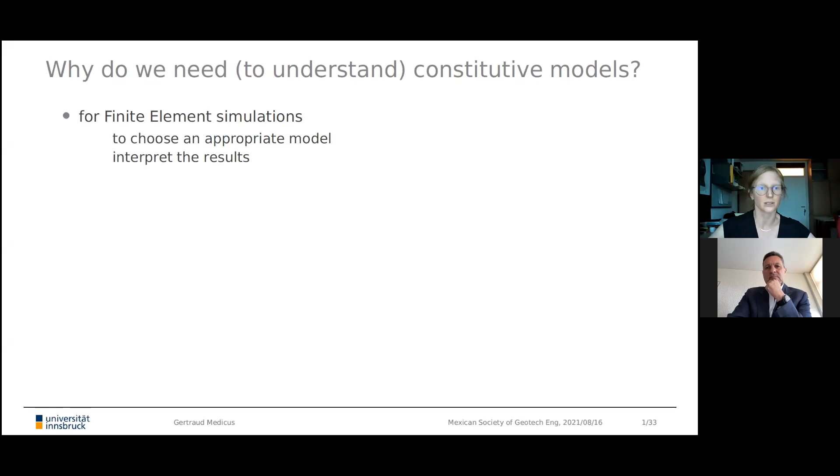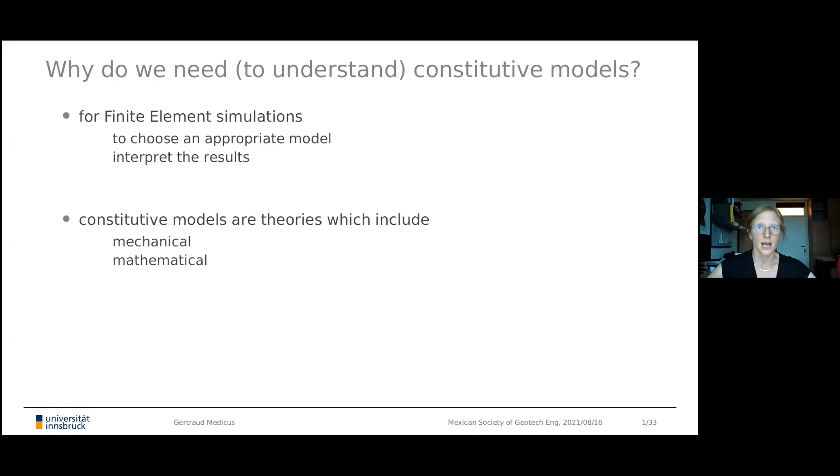Before I show the visualizations, I will give a short introduction to the topic. Why do we need constitutive models and why do we need to understand them? We certainly need constitutive models if we carry out finite element simulations, and we need to understand the model in order to choose an appropriate model and in order to interpret the results. In addition, constitutive models are also theories which include certain mechanical and mathematical concepts, and understanding these concepts can also help to understand and explain soil mechanics. Constitutive models are therefore frameworks which provide the possibility for further understanding.

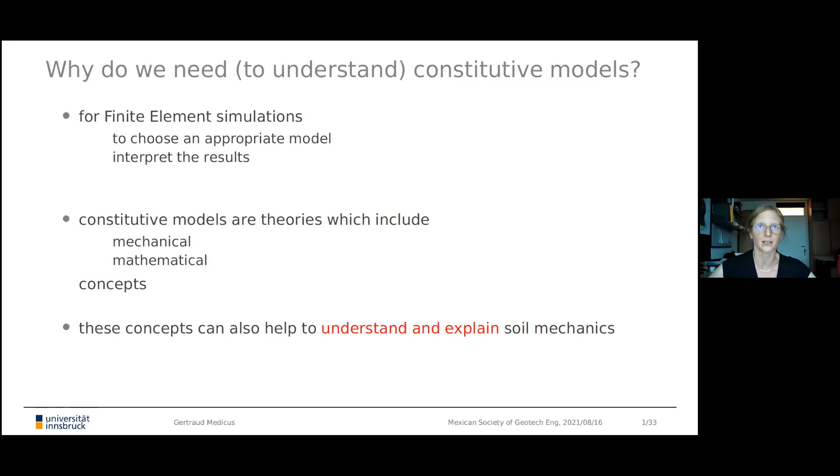There are many important aspects related to teaching and learning constitutive models. Amongst others, one has to carry out computations in order to understand the equations. It's important to get explanations and it's important to have discussions. There are fantastic books related to constitutive modeling, and of course there are university courses and videos available. And there's definitely a lot more.

In this presentation, I will hardly talk about the issues above, because I will only or almost only show visualizations and animations as one possibility to improve the visual aspect of teaching soil constitutive modeling.

The project I'm talking about is an ongoing project. I will therefore not present a complete and finished project. I just picked certain topics related to yield and failure surfaces and different constitutive models. And within these topics, I choose and explain certain included concepts.

This presentation should give an overview about the project, and I want to address two perspectives: the learning perspective, where I will give some explanations, and the teaching perspective. I want you to get an overview of what can be used from this project, because the whole idea behind it is to share the visualizations as teaching and learning material with everyone.

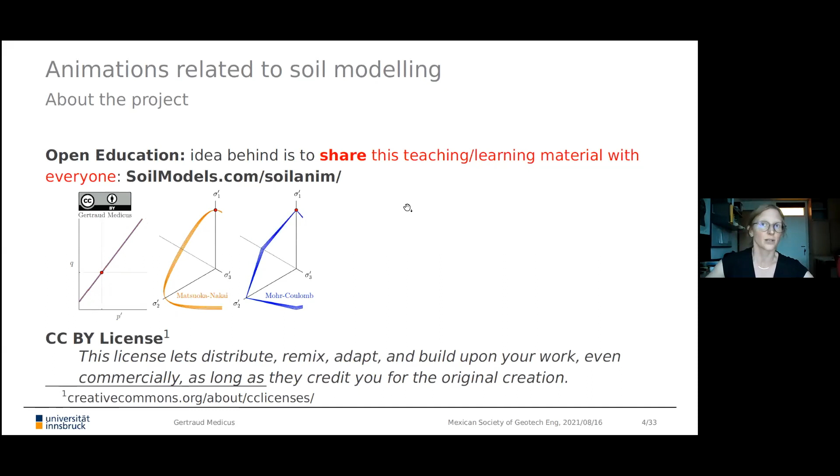I will now give a short introduction on stress measures and stress invariants. In this whole presentation, stresses are considered positive in compression, and we often use principal stresses to characterize a certain stress state in geotechnical problems. If we then also only consider axisymmetric stress state, it is sufficient to display stresses in the PQ plane, mean effective stress versus deviatoric stress. The red line is, for example, the Mohr-Coulomb failure line with zero cohesion.

I show an example of a stress path of a conventional drained triaxial test of rather loose sand. I will a bit later show corresponding stress-strain curves and volumetric response. This is just for the introduction here.

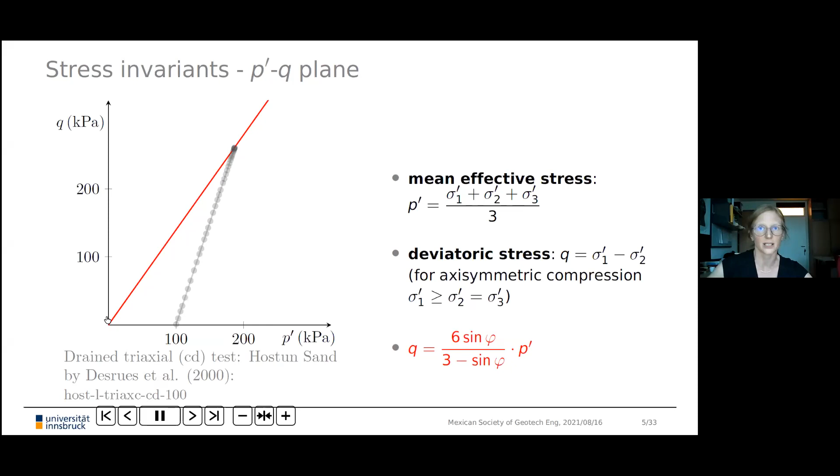If I continue to just consider principal stresses, then we can display a general stress state in three-dimensional principal stress space. On this slide, I show the Mohr-Coulomb hexagon in principal stress space. The blue line is the hydrostatic axis, which includes the mean effective stress of a certain stress state, that is the red bullet here. And the distance of this red stress state to the hydrostatic axis can be described by...

...the deviatoric stress. Now I let the hexagon rotate towards the deviatoric plane if we look in the direction of the hydrostatic axis. In order to define the location of this red bullet, this arbitrary stress state, we need a third stress invariant or stress measure.

And that can be the Lode angle. In this presentation, I use the following definition of the Lode angle: for triaxial axisymmetric compression, the Lode angle is chosen to be 30 degrees, and for triaxial axisymmetric extension, the Lode angle is minus 30 degrees. So we have one possibility for three stress invariants: the mean effective stress, the deviatoric stress, and in the deviatoric plane, the Lode angle.

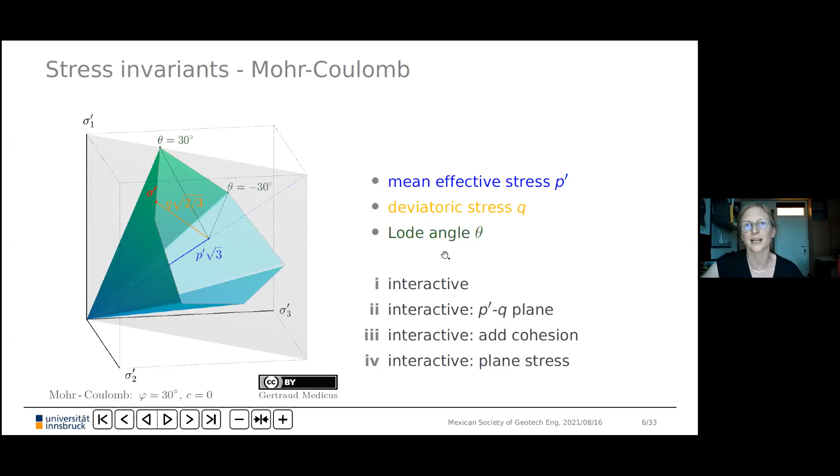One disadvantage of the animations is that I choose where you have to put the focus, I choose where you have to look. And maybe you would be interested in looking at another direction of the Mohr-Coulomb hexagon. That's why I recently started making interactive graphics.

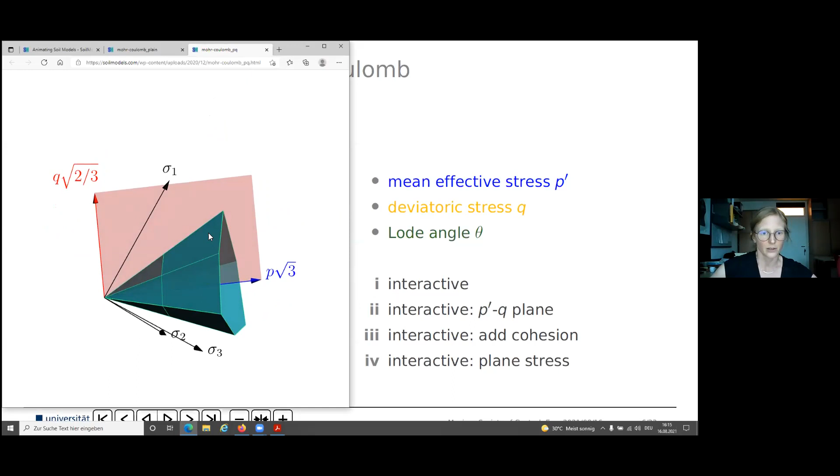Here I again show the Mohr-Coulomb hexagon, and you can zoom in, zoom out, and turn it yourself, for example towards the deviatoric plane. Here I added the p'-q plane for triaxial axisymmetric compression states, and you can again turn yourself, for example towards the deviatoric plane or wherever you want.

In this plot, I added cohesion to the Mohr-Coulomb hexagon, which results in a shift of the hexagon. Adding a cohesion allows certain tensile stresses and also allows plane stress predictions. And that's what we can see here, where the solid and transparent part of the hexagon meet. That's how plane stress prediction would look for the Mohr-Coulomb hexagon, including cohesion.

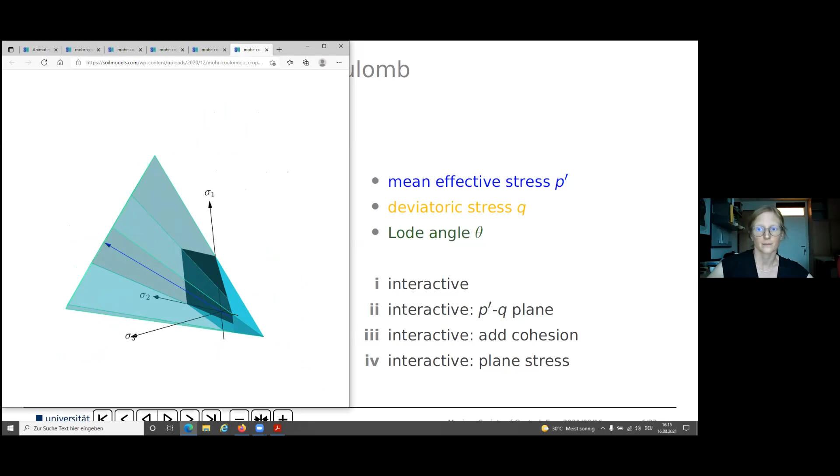I will continue to show more yield surfaces, and I will also show more of these interactive plots. Here I want to mention that all of these interactive plots have been created with the software Asymptote.

Asymptote is a free software, very useful for creating diagrams and very nice for creating 3D figures. And talking about Asymptote, I want to thank Hans-Peter Schröcker, a mathematician, for suggesting to use this software, because it is very suitable for creating these kinds of figures, and I hope also for understanding shapes, even a bit later, more complex shapes of 3D surfaces.

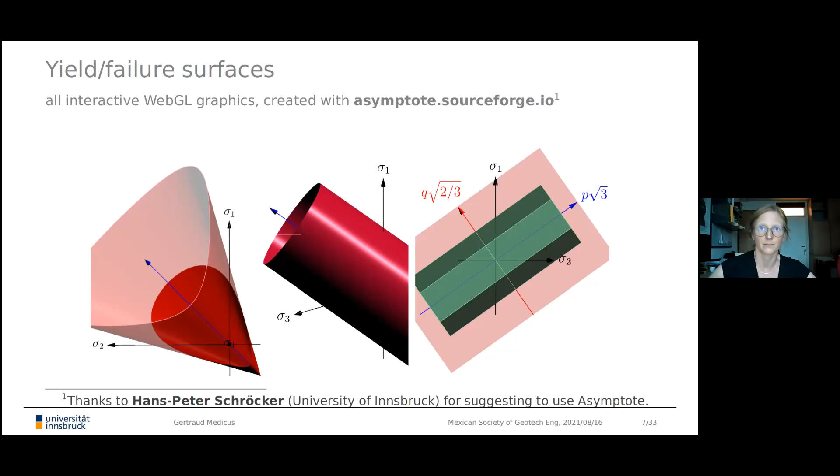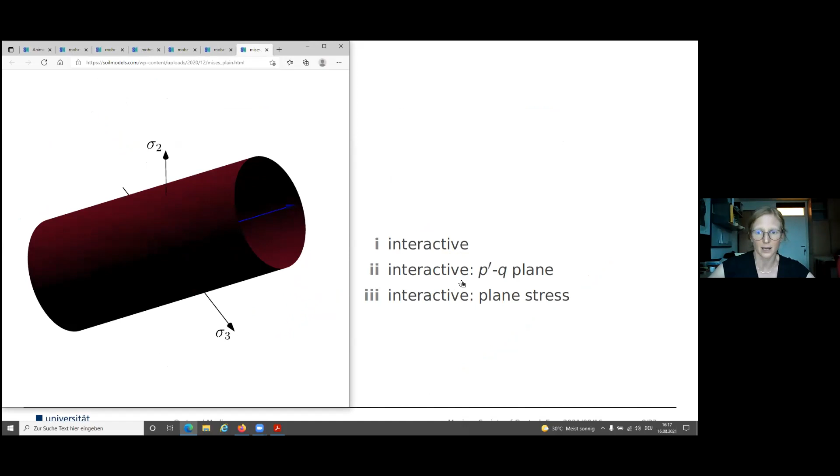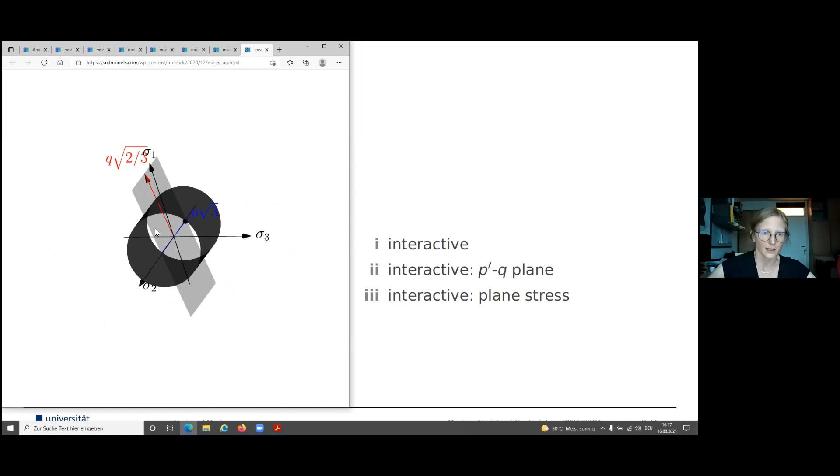Here I show the yield surface according to von Mises. The cylindrical shape implies that strength is independent of mean effective stress. If I increase mean effective stress, I still get a constant shear strength.

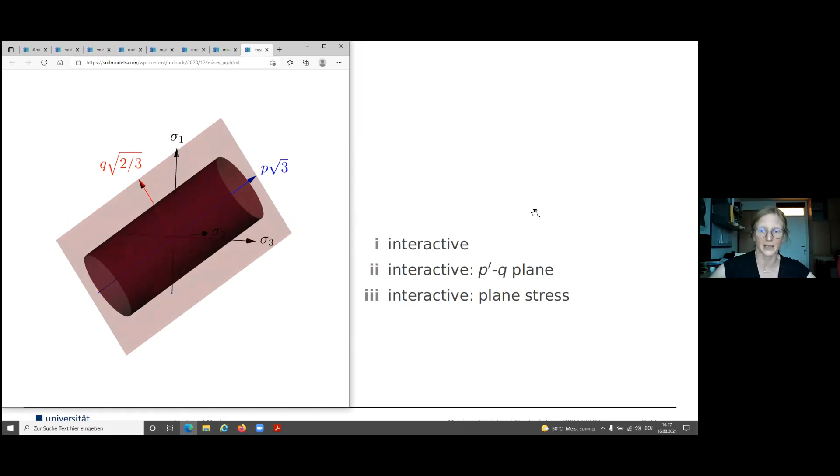The von Mises criterion is used mainly to describe yielding of metals. And again, you can have a look how plane stress predictions would result from the von Mises yield surface.

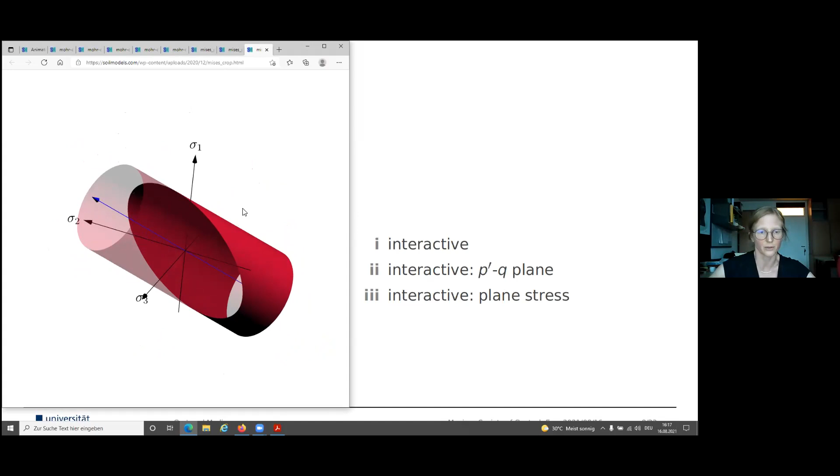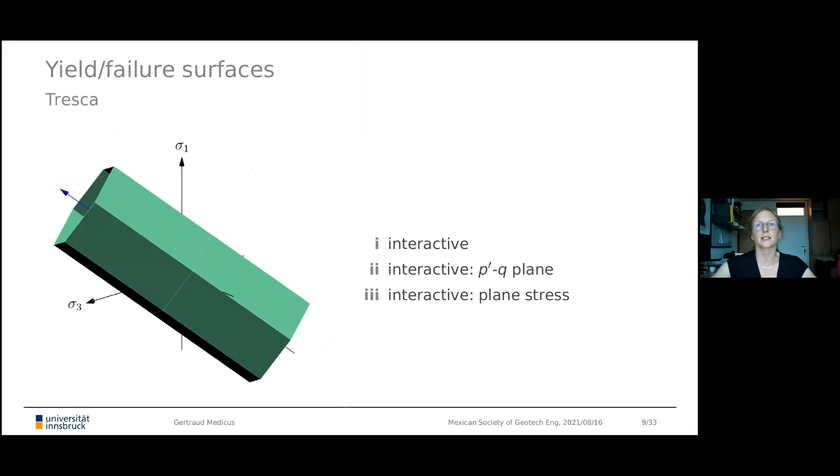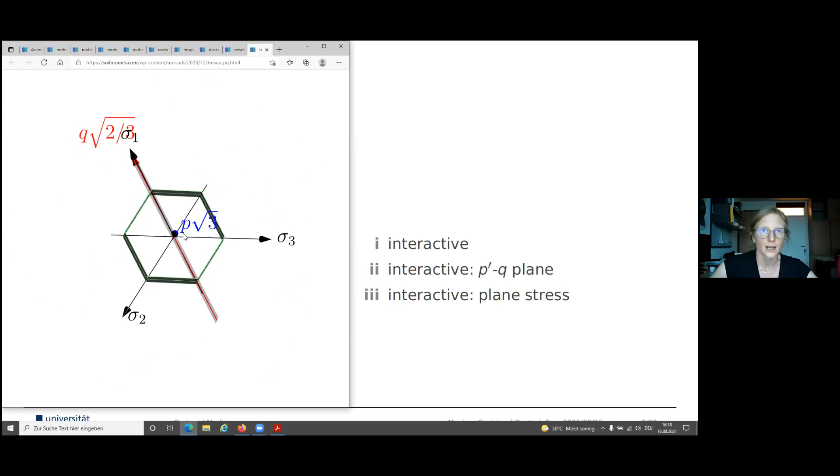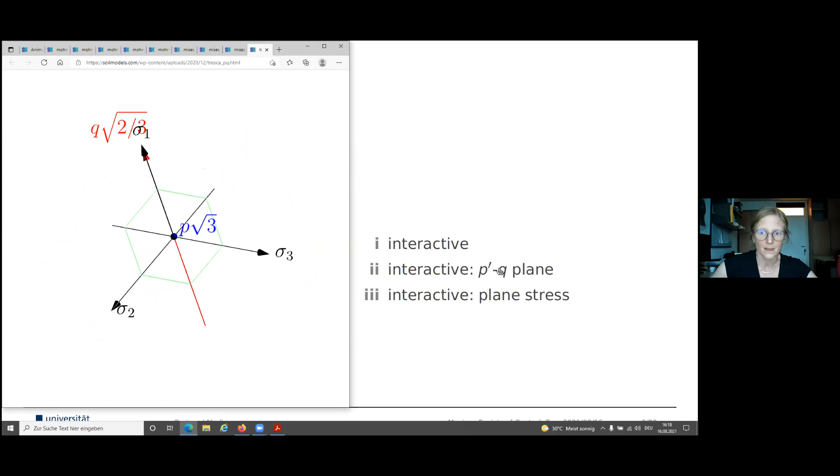A bit similar to that is the Tresca yield condition, whose intersection with the deviatoric plane is a regular hexagon. Again, we can see that an increase in mean effective stress does not affect strength predictions, at least not for a constant Lode angle. You can again have a look where the transparent part meets the solid part, how plane stress predictions would look for the Tresca yield condition.

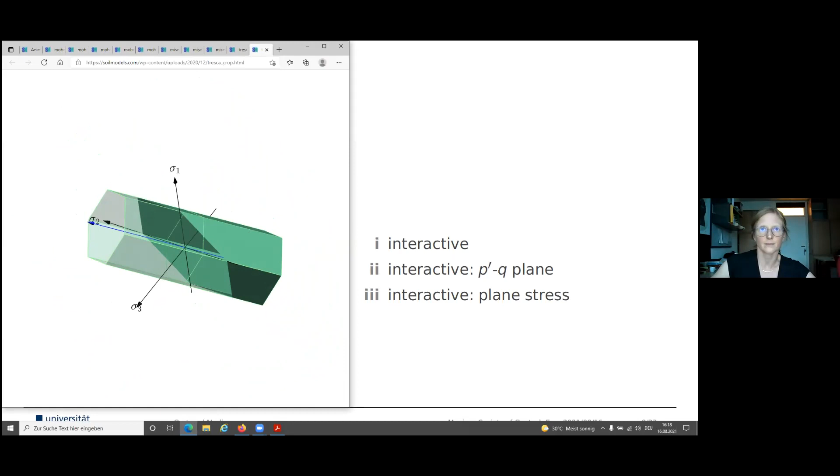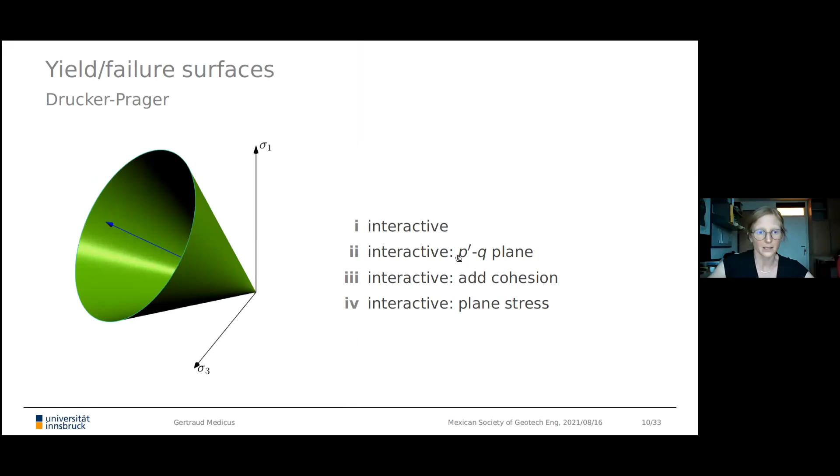That's different to those surfaces describing strength of frictional materials, as I started with Mohr-Coulomb. Here I show Drucker-Prager with a circular shape in the deviatoric plane, and it's again visible that an increase in mean effective stress results in an increase of deviatoric strength. Adding a cohesion results in a shift of the Drucker-Prager surface towards the tensile stresses.

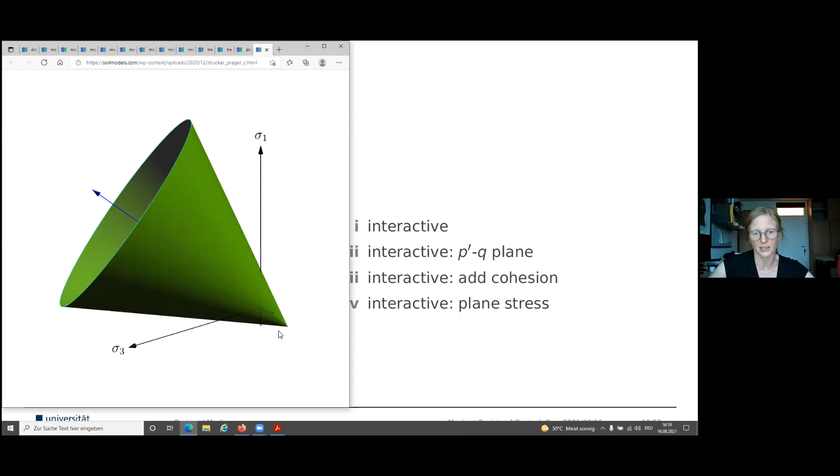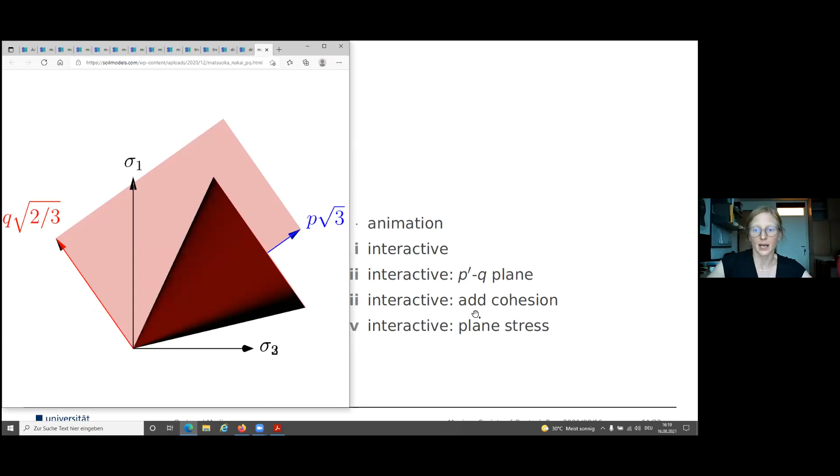On this slide I show the cone according to Matsuoka-Nakai. On the website, and also linked in the handout, you can have a look at the same animation as just shown for Mohr-Coulomb, and even a bit longer. I again added the p'-q plane and cohesion, and I also show how plane stress predictions would look for Matsuoka-Nakai.

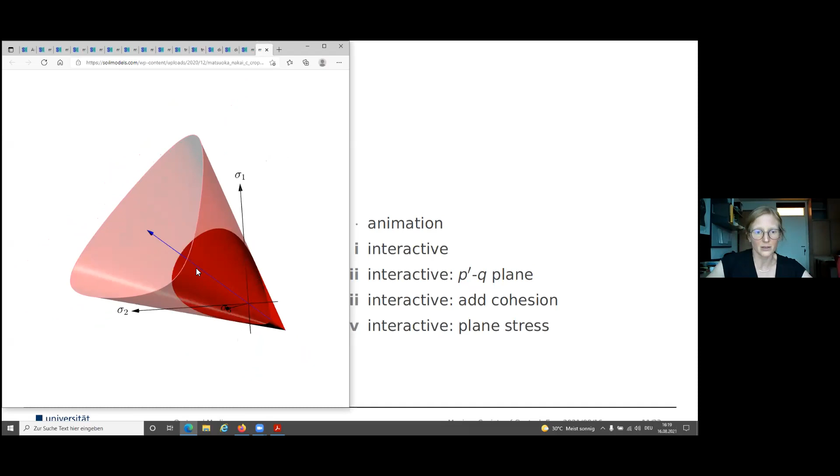Probably you could already see that the shapes of Matsuoka-Nakai and Mohr-Coulomb differ. To better estimate how much they differ, it helps to plot them in one diagram here on the left. Blue is again the Mohr-Coulomb hexagon, and red is Matsuoka-Nakai.

On the left, I show the difference between Matsuoka-Nakai and Mohr-Coulomb by comparing the mobilized friction angles for different Lode angles. Here, for a friction angle of 30 degrees and zero cohesion, the predictions for triaxial axisymmetric extension and triaxial axisymmetric compression coincide. I start the animation at triaxial axisymmetric extension and slowly increase the Lode angle, and we can see that the difference in mobilized friction angle increases up to around 17%, and somewhere between 0 and 15 degrees the difference is highest.

Then, as this point further approaches axisymmetric triaxial compression states, the strength predictions coincide again. The range of Lode angles somewhere between 0 and 15 degrees is exactly the range where plane strain failure is reported to occur. As geotechnical problems are often idealized under plane strain conditions, it's definitely worth focusing on that range when you investigate a constitutive model.

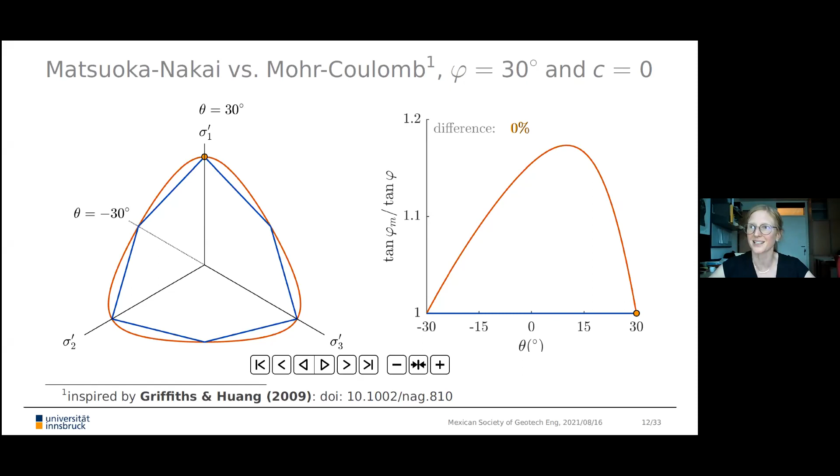I hope you can still hear me. It's pouring outside and it's quite loud, but I hope it still works.

This is the normalized deviatoric plane with experimental data of critical stress states of reconstituted San Francisco Bay mud. Again, in blue, I show Mohr-Coulomb, and I fitted the experimental data with Matsuoka-Nakai, choosing the friction angle of Mohr-Coulomb so that axisymmetric compression and extension states coincide. Doing that, Mohr-Coulomb predictions are conservative compared with Matsuoka-Nakai and compared with the experiments.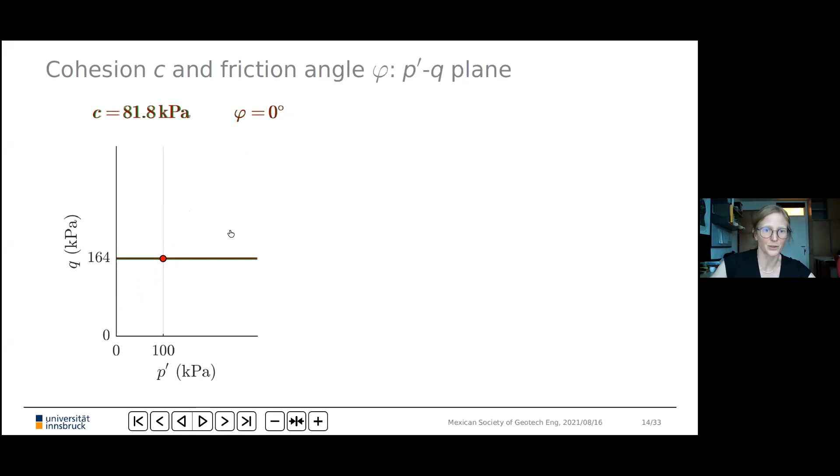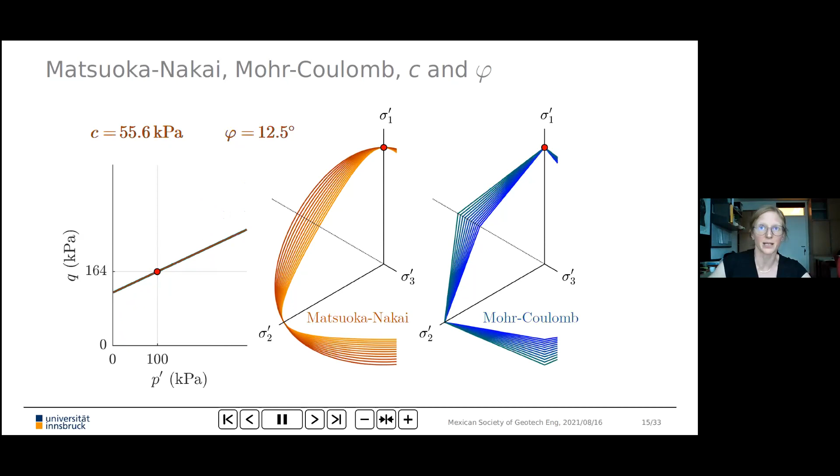I will now just repeat the same here on the left. I will keep this axisymmetric compression state fixed, and I display the deviatoric planes for 100 kilopascal, with Matsuoka-Nakai added in the middle and Mohr-Coulomb added on the right. I will continue to increase the cohesion and reduce the friction angle, and if we look at the deviatoric planes, we see that this also affects the strength prediction for all deviatoric directions except axisymmetric compression.

Eventually, Matsuoka-Nakai for zero friction angle and constant cohesion will turn into Mises, and Mohr-Coulomb will turn into Tresca for zero friction angle. So it's important to keep in mind that the cohesion affects the shape of failure surfaces in the deviatoric plane, even though strength for axisymmetric triaxial compression is kept constant in this animation.

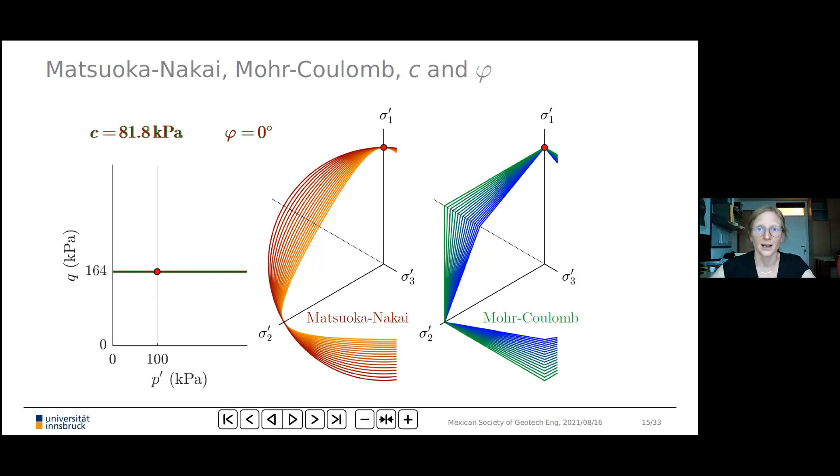So far I haven't talked about a single constitutive model, but only about yield or failure surfaces, which are often included in soil models. I now start with the linear elastic perfectly plastic model, including the failure surface or failure line according to Mohr-Coulomb.

Here on the left is the figure I already showed, the PQ plane with a Mohr-Coulomb failure line and the stress path of an initially loose Hostun sand sample, which approaches the critical state line. Above right, I show the stress-strain response, the deviatoric stress over axial strain, and below I show the volumetric response of the experiment.

I add the simulation with the model, and we can see we prescribe the stress path, and we can see that the strength is described through the Mohr-Coulomb failure line. I tried to fit the initial stiffness with the elastic modulus, and I tried to adjust the Poisson ratio to get an okay response of the volumetric response.

I now increase the initial mean effective stress from 100 to 200 kilopascal, and we can see here exactly what we want: that an increase in mean effective stress results in an increase in strength, and that's what we can see in both figures above. We can also see that an increase in stress level does not result in an increase in stiffness; it keeps the stiffness constant.

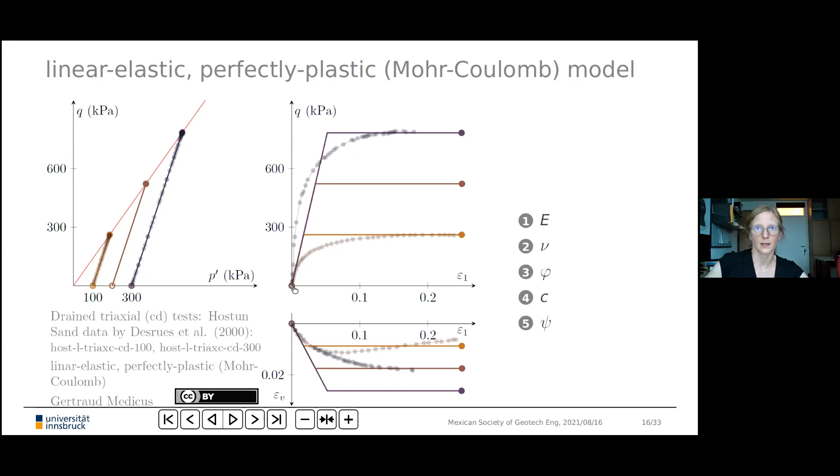On the next slide, I vary the Poisson ratio, increasing it for this response of a conventional drained triaxial test. For this conventional drained triaxial test, we can see that a change in Poisson ratio only affects the volumetric response in that case. For other element tests with kinematic constraints, such as the oedometric compression test or a plane strain biaxial compression test, the Poisson ratio does affect the stress path.

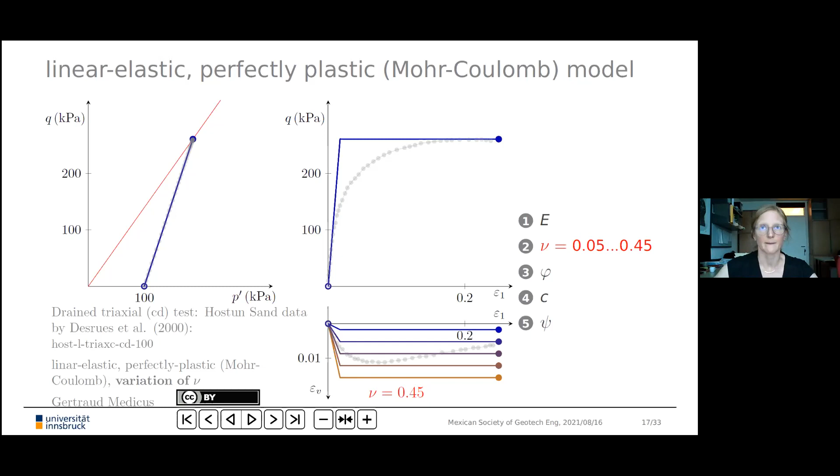I recently uploaded some animations related to the influence of the Poisson ratio on the web page to illustrate the effect on stress path. There is a bit more related to linear elastic perfectly plastic models on the web page.

I will now present models related to critical state soil mechanics. There are a lot of models related to critical state soil mechanics; I chose the modified Cam-Clay model and clay hypoplasticity.

On the left, I again show the p-q plane with the red line, which is the so-called critical state line, and the blue line here is the hydrostatic axis. On the right side, you can see the void ratio-mean effective stress plane, again with the critical state line in that plot, and a so-called normal compression line to define normally consolidated states.

If a constitutive model includes the void ratio or an overconsolidation ratio as an additional state variable, that makes it possible to distinguish between loose and dense states, or different overconsolidation ratios.

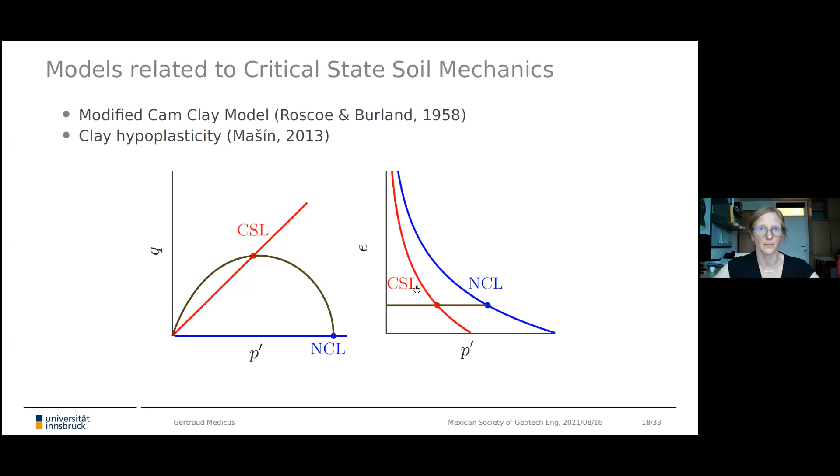In both models, there is a stress-dependent critical void ratio in the void ratio-mean effective stress plane in order to distinguish between loose and dense soil, or for clays between normally, slightly, and highly overconsolidated clays.

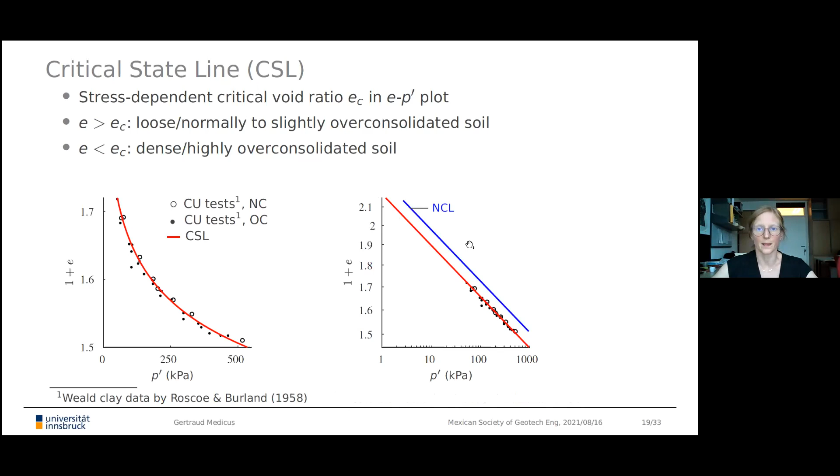Below, I show the void ratio-mean effective stress plane with the critical state line in this plot to distinguish between slightly overconsolidated and highly overconsolidated states, and I show the normal compression line.

I will now show the simulation of a conventional drained triaxial test of an initially normally consolidated clay sample. Normally consolidated means that the current mean effective stress is equal to the pre-consolidation pressure, and that implies that the initial state is on the so-called normal compression line.

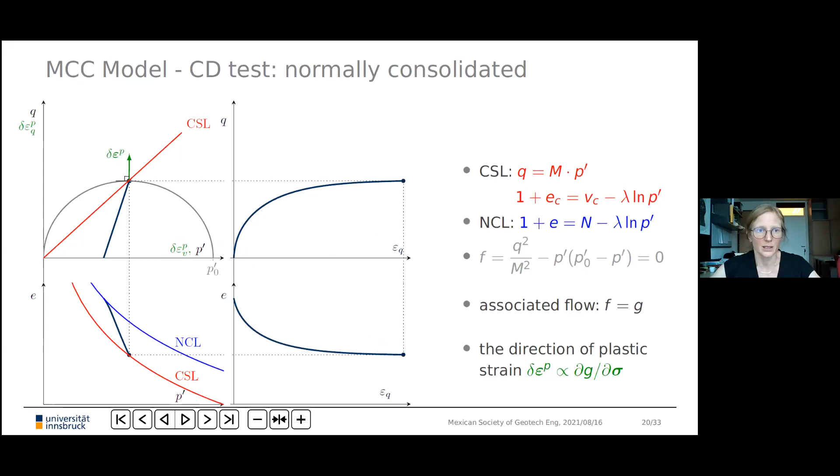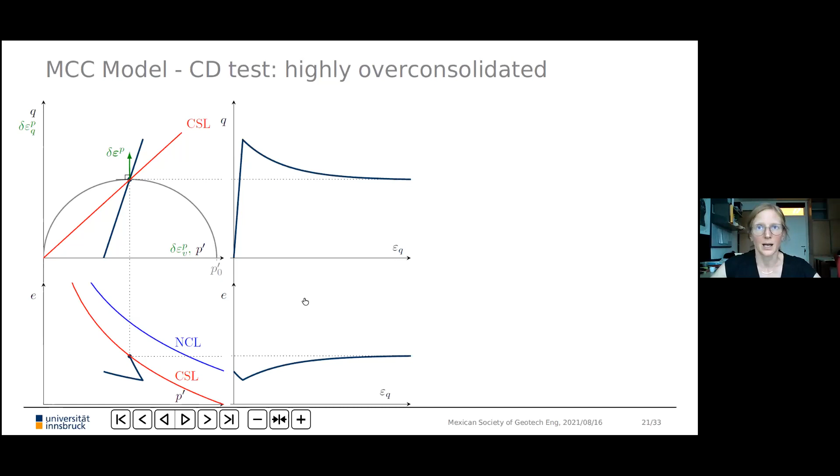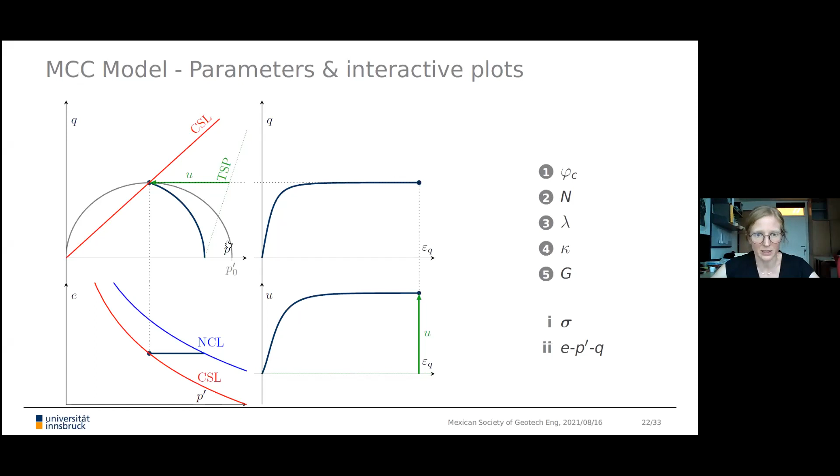I talked a bit about this elliptic yield surface here in stress plane. If we have a look in principal stress space, I can show how the yield locus of the modified Cam-Clay model would look. In the deviatoric plane, in that case, Drucker-Prager is assumed.

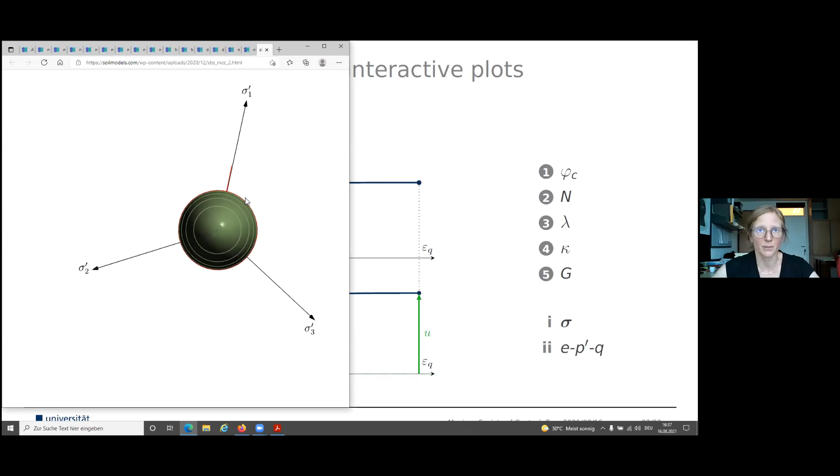That brings me to visualizations related to clay hypoplasticity, which includes very similar concepts as the modified Cam-Clay model. It's just that the mathematics behind it differ a lot.

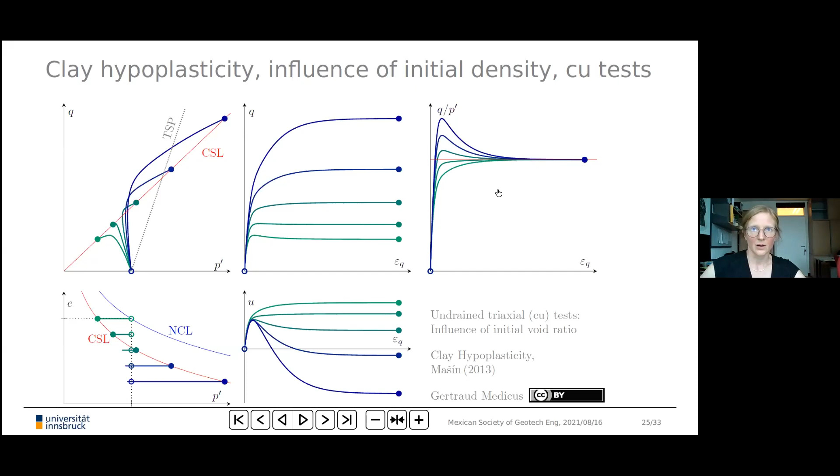We can see here that, independent of this, with a constant void ratio in the framework of critical state soil mechanics, critical strength depends on the initial void ratio, but not on the initial mean effective stress if the void ratio is kept constant in all simulations.

However, again, the initially highly overconsolidated samples can exceed the critical state line, and higher stress ratios than the critical stress ratio can be reached.

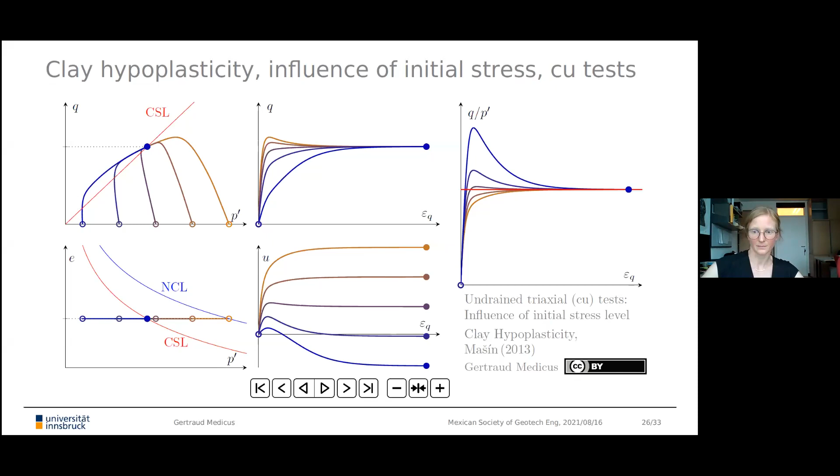And what you can also see here compared to the modified Cam Clay model is that the response is smooth. Yes.

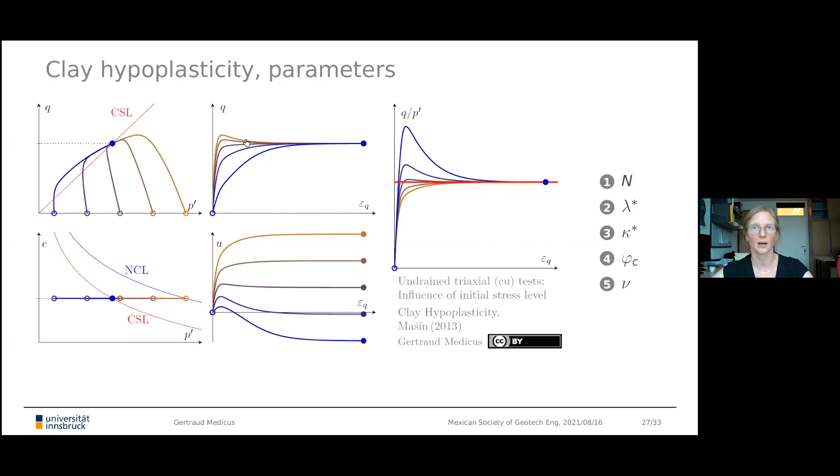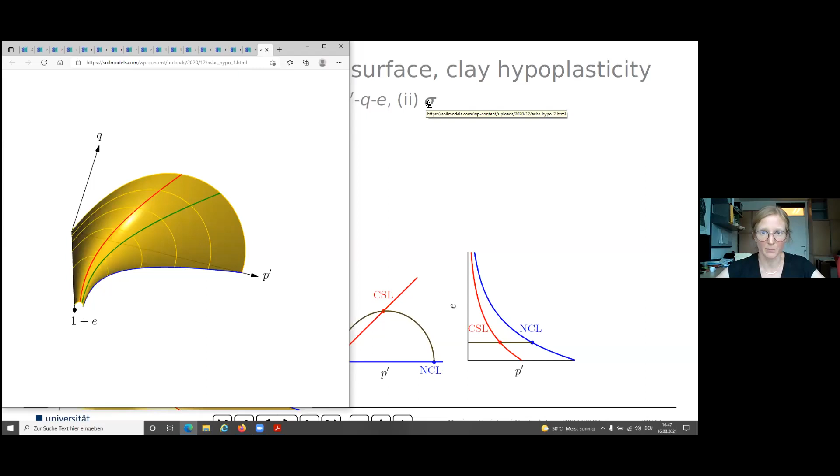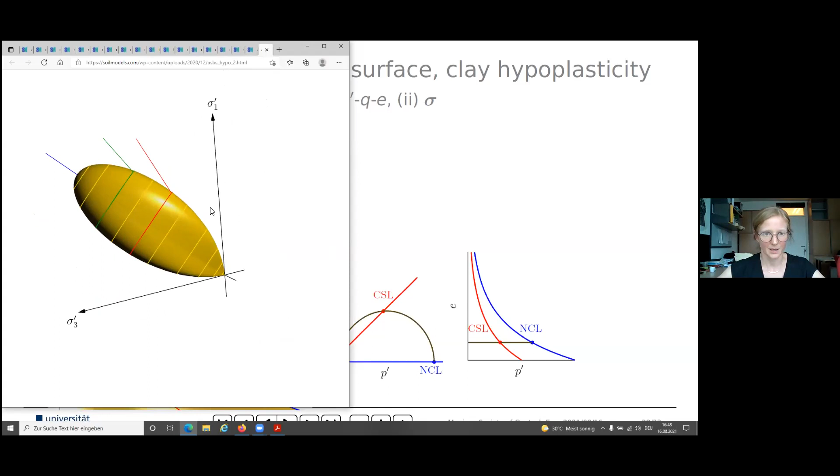I will now talk a bit more about the project and which material can be used. You find those interactive graphics which are included in web pages, in a sub page of soil models. You can directly download the visualizations as a PDF or a GIF animation.

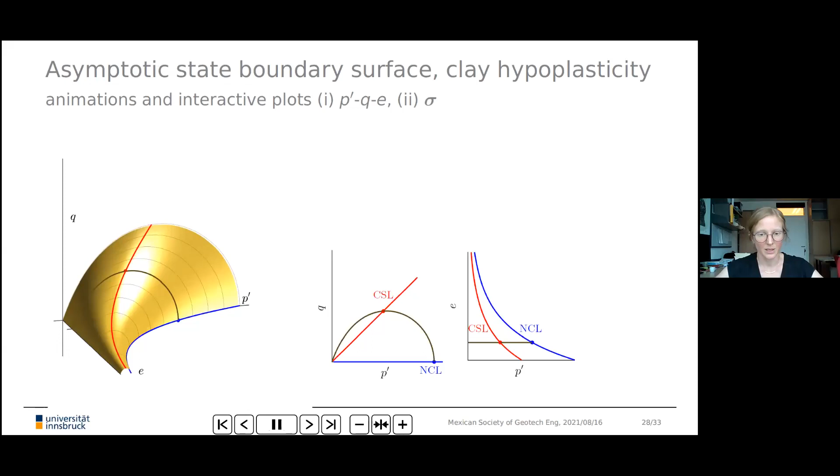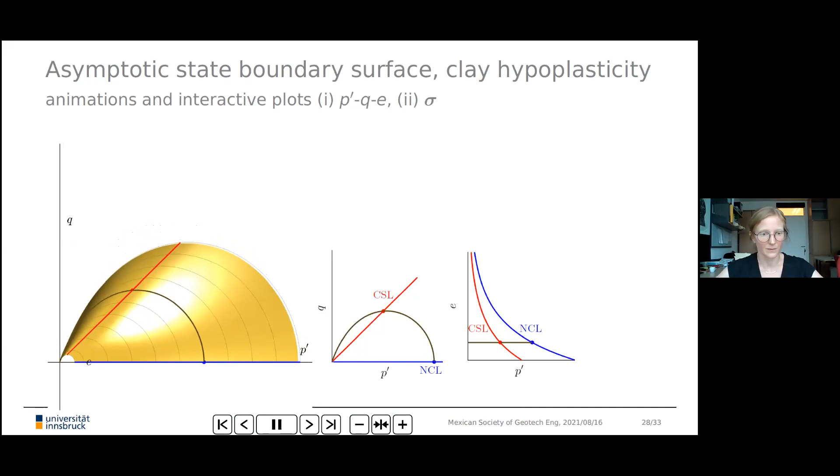I will explain that here. The advantage of the PDF animation is that you can take a break if you want. You can increase speed, and of course you can decrease speed. You cannot do that with a GIF animation. Therefore, it might be of interest to use the PDF animations, and you can find them on a web page.

You can also find all slides of an animation as PDF, which makes it easy for you to pick the slides you want to use. If you just want the last slide, you just pick it and don't necessarily have to take all of them.

Where to find these animations? You can find all the visualizations on a sub-page of the soil models page. There are a lot of further useful things on the soil models web page. Probably most of you know the page, but for those who don't, it's definitely worth having a look.

For example, there is a calibration tool. If you have laboratory test data, you can upload it and calibrate different constitutive models like the modified Cam Clay model or hypoplastic model. For some pages you need an account, but it's free.

Talking about soil models, I want to thank David Mašín from Prague for providing this subpage and for supporting me on this web page. In addition, you can find MATLAB scripts to calculate and plot 3D surfaces of Matsuoka-Nakai, Mohr-Coulomb, and Lode angle dependent criteria.

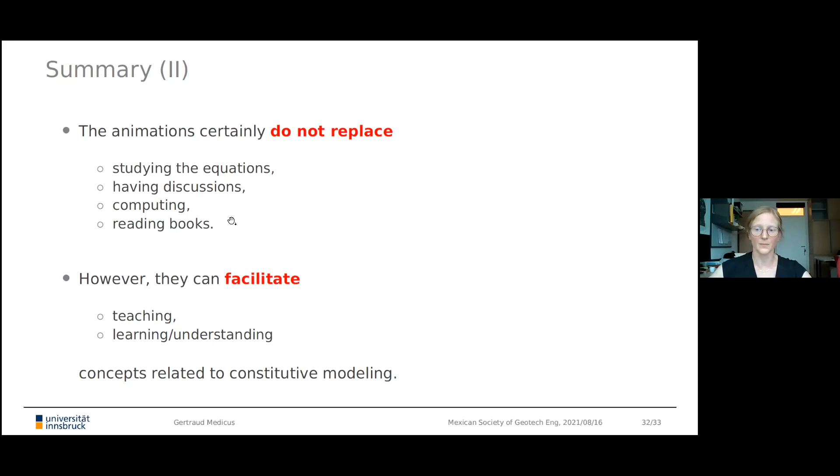That brings me to the last page, the acknowledgement. It was a bit more than a year ago that I started sharing my visualizations on social media. Some people liked them and asked if they could use the visualizations for teaching. That was, in fact, the idea for the project, that I continue with what I like and that others and I can use them for teaching and learning.

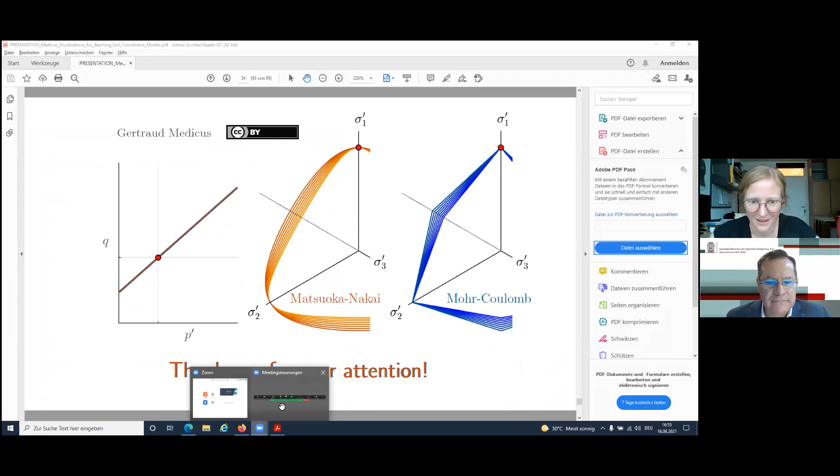Maybe it's in the chat as well.

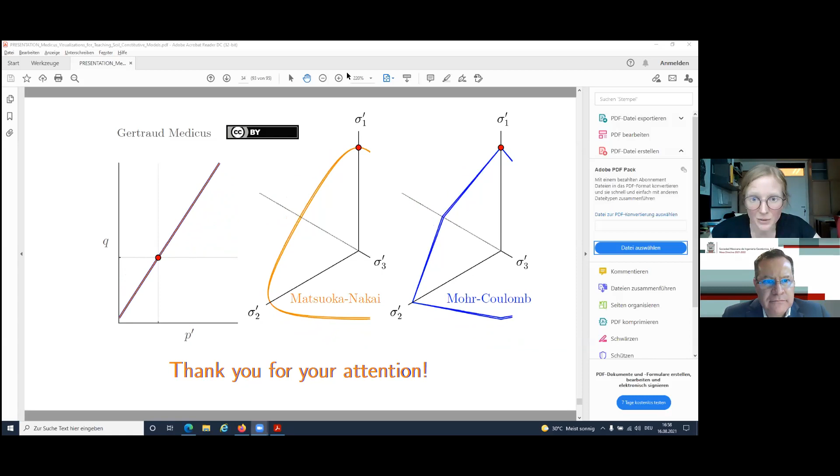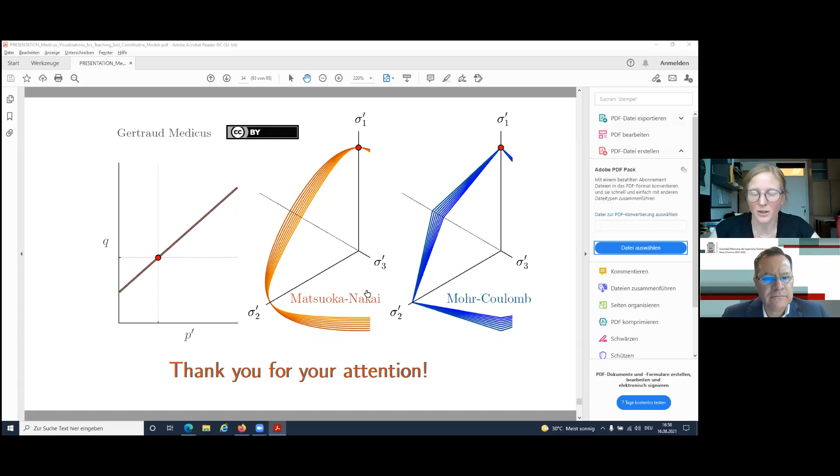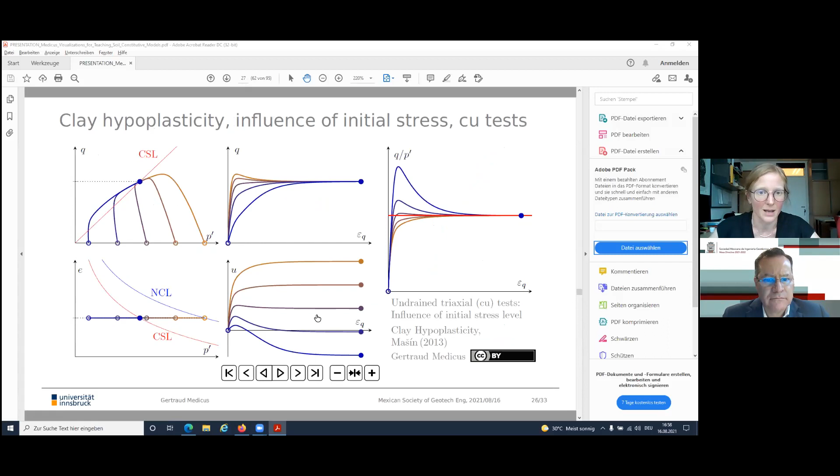You can use the calibration tool for your own test data because you can upload it. So far I've only uploaded scripts for the three failure surfaces I showed. There you can certainly adjust, for example, the critical friction angle for your test data. Apart from that, I haven't uploaded the scripts, only the animations. But if you think you can use them for your data, just write an email and we can see what you need. Maybe if you give an example of how you could use this for your data, then this could certainly work.

Okay, excellent, doctor. Also, Dr. Paul Garnica asked: can cyclic tests be displayed using these visualization tools?

Yes, in fact we recently did that. I didn't show an animation of cyclic response, but we have a journal article under review, and we also added animations to that, comparing different small strain and cyclic approaches. I will link them to the webpage to describe the cyclic response.

Yes, okay, this is the plan, coming up next month. Oh, excellent, that will be interesting.

Ruben Flores asked if anyone knows of some geotechnical modeling for soft soils and its applications in embankments.

This question is a little confusing. I don't really get it - is this about models for soft soils like the modified Cam Clay or clay hypoplasticity?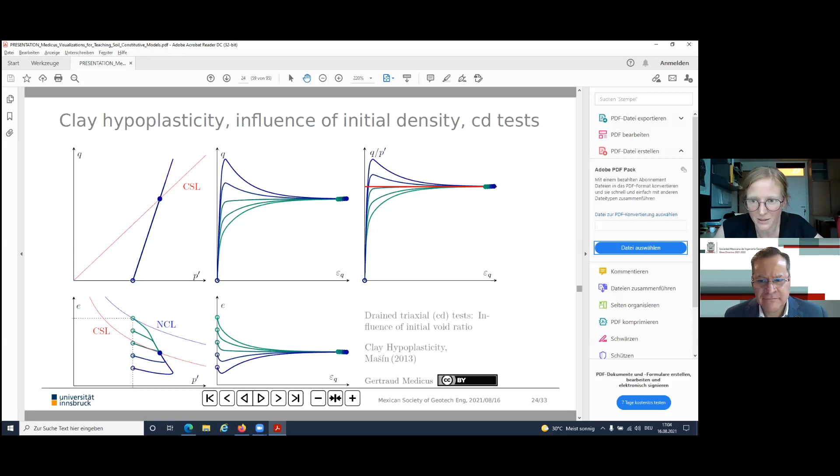And yeah, that's good if it helps. In the handout, there are some other useful tools. On the last page I added some further useful information and other examples that can be used for visualization, teaching, or understanding soil constitutive modeling, including the calibration tool I talked about, and also another interactive visualization of the original Cam Clay model by another researcher called Anil Yilnis, which you can check out if you download the handout.

I also saw the next question related to books, and there is a YouTube channel by Nicolas Espinosa that I can highly recommend in order to get detailed explanations of this or a similar topic. So there are a lot of other very useful tools available.

Excellent, Flavio Rojeiro. That's a great project, not only because you can have a better perception of the model performance, but because you can have the opportunity to choose the best model for the situation that you are studying. Have you used it to visualize the influence of suction on strength for unsaturated soils?

I haven't done that, and I fear this would be definitely really interesting because this is a very important topic, but I fear I won't have enough time. The reality is I made one animation and I have the idea for two more, so I have a kind of exponential growth of ideas. But the more time I spend on the project, the more I realize how much time I could spend on it. I fear I won't complete this within this project, but I take note anyway, because I have a long to-do list, and who knows what the future brings.